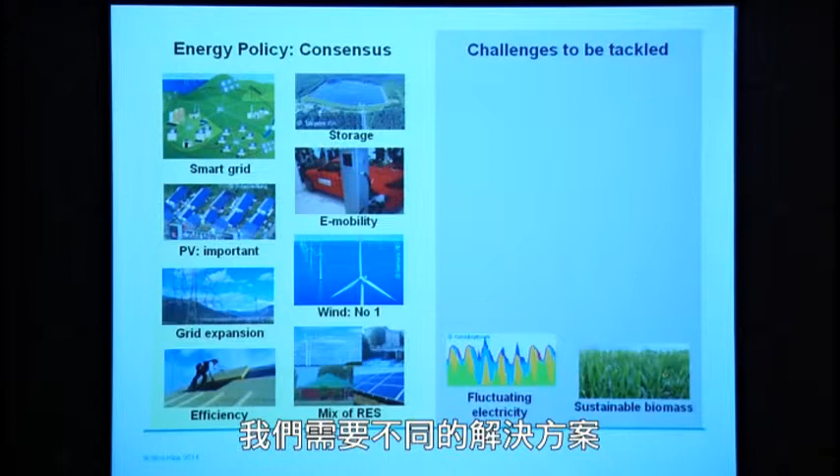We have to deal with the fluctuating electricity. We have to further work on solutions. Biomass will be used, but it has to be provided in a sustainable way. This is very important. At the beginning, renewables need a higher investment, and so we have to deal with the problem to finance these costs.

The role of nuclear and fossil power has to be decided by the governments, and governing that transformation is very important. I want to say and underline that again. It's a question of policy to decide the goal and decide the necessary measures to make that happen.

And what we also need and will see is new business models, because if the energy world is changing, also new business models are necessary to attract private investments into that sector and make that happen. So these are some of the main topics which are there in that field.

I want to come to the smart energy cities, because cities and regions are very important to make the transformation happen. Why is it so important? 75% of greenhouse gas emissions are produced in cities and communities, and a lot of these transformation measures I already mentioned must be realized on local level.

So an active contribution of the citizens is necessary, of the industry, the public sector, because they have to invest in energy efficiency and in renewable energy. They have to change the type of mobility and use public transport, and they have to change perhaps also their behavior and accept the changes.

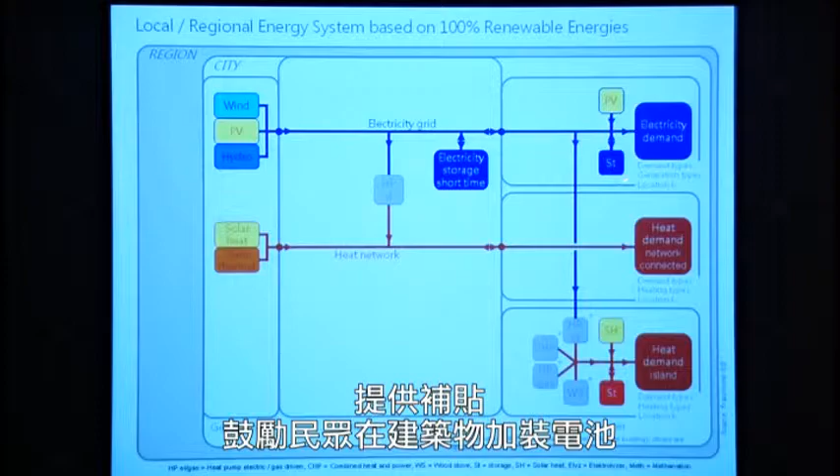What we see is that photovoltaic is more and more installed on the buildings, and also in Germany we now have a subsidy program which provides subsidies to install batteries on building level in connection to the photovoltaic plants in order to shift a little bit of the solar electricity from the day towards the night. But short-time electricity storage capacities will also be installed on distributor and grid operator level.

What we will see is that electric vehicles will be charged on the building level, but also on the distribution grid level, and this will also influence the demand curve on the electricity grid. We will install more solar thermal systems with storage either on the building level, but also what we see in the future is heat storage on a seasonal level.

This means heating up these huge storage tanks with several thousand cubic meters of hot water during summertime by solar energy, and this can be used in wintertime for space heating.

What we see is we already have a gas network, a natural gas network, and this can be transformed or used in future to transport biogas, and so biogas will be available to run combined heat and power plants or gas heat pumps, and biomass can also be used as wood for wood stoves in the buildings.

But if we have this biogas network, we can also use that for centralized combined heat and power plants, which are providing heat and electricity. We can use it for heat pumps and also for combined heat and power plants here on these bigger buildings. This could be an industry plant, this could be also a shopping mall or something else.

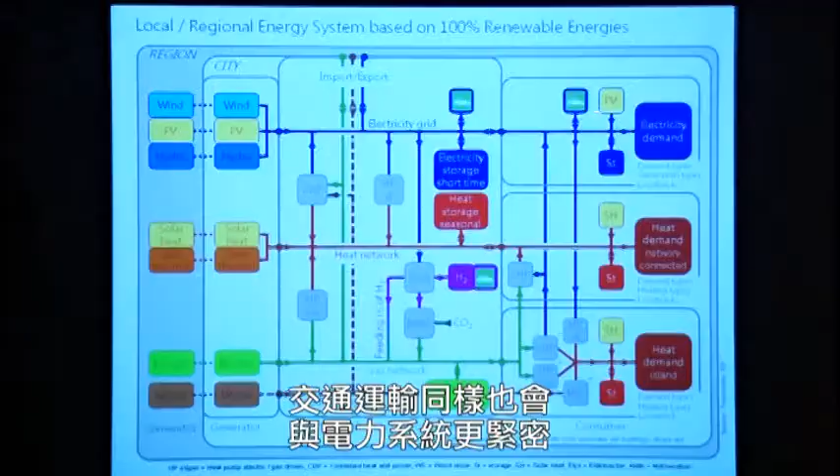So what I wanted to show to you here is this general description of the energy system of the future. First of all, only renewable energy will work. It's possible to create an energy system which is only driven by renewable energies. And secondly, what we will see in the future is that the electricity, the heating network and the gas network will be working much more closely together and will be much more connected to each other. Also, the transport sector will be much more connected to the electricity sector.

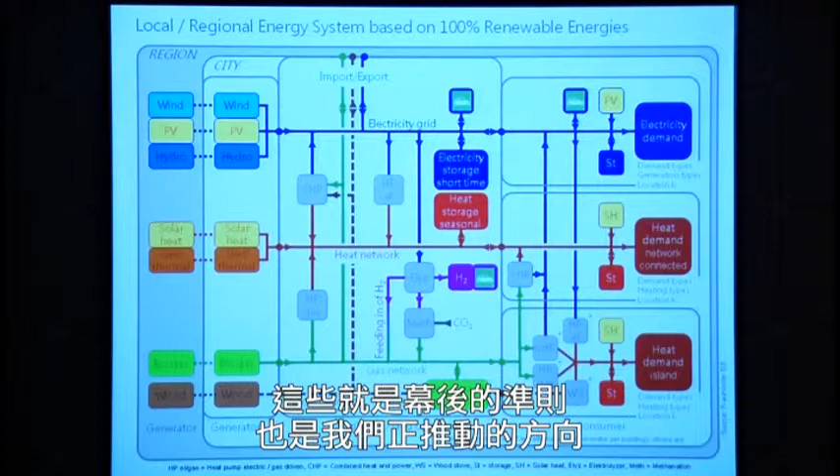So this leads to the point that we have to find intelligent systems and ways to design and run these kinds of systems, because it is much more connected, and we have to deal with the fluctuations as well. So this is the principle behind it, and this is the direction in which we are working.

So to summarize the characteristics of that kind of system: we will see an increased regional autonomy, so a decentralization. We will see an increased interdependency of energy sectors: electricity, heating, cooling, mobility. We will see an increased complexity of the system, so this needs intelligent control concepts and strategies. And the use of smart technologies is necessary, ICT, self-optimizing subsystems.

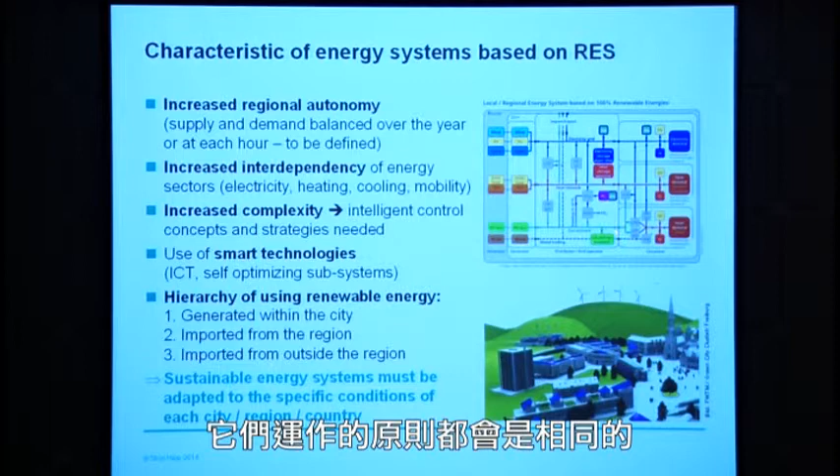And the hierarchy of using renewables is very simple. First, use the energy generated by renewables within the city. Then the energy which can be imported from the region, and then, if it is not sufficient, also imported from outside the region. And this means a sustainable energy system must be adapted to the specific conditions of each city and region and country. So if you have such systems which can be applied to every kind of city or region, the principle is always the same, but you have to find the right adaptation to the specific conditions you have.

What does this mean? How to come to such a system? This is very simple. You have to develop roadmaps. If you start with today's energy system, you have to define a target energy system. So target setting is important, where you want to go to. Development of target energy systems is based on the specific targets on the one hand, and also on the assumptions for the boundary conditions.

If Taiwan is thinking about the long-term development, you have to think about if electricity demand will increase or will be reduced. What do you expect? How much efficiency increase will be possible? You have to take that into account if you want to design the target energy system.

And if you have a clear picture of the future, then you can develop the transformation roadmap. Which measures are necessary, in which order, which investment costs are needed, and how to design this transformation in a robust and flexible way. So the roadmap development will follow in a second step. This is the principle of how you come to such a concept for such a transformation process.

This can only be done if you use some computers, some modeling tools. So we developed modeling tools to calculate such optimized target energy systems for cities, temporal highly resolved simulation of the electricity, heat and cold and transport systems. So you see here some examples of these calculations.

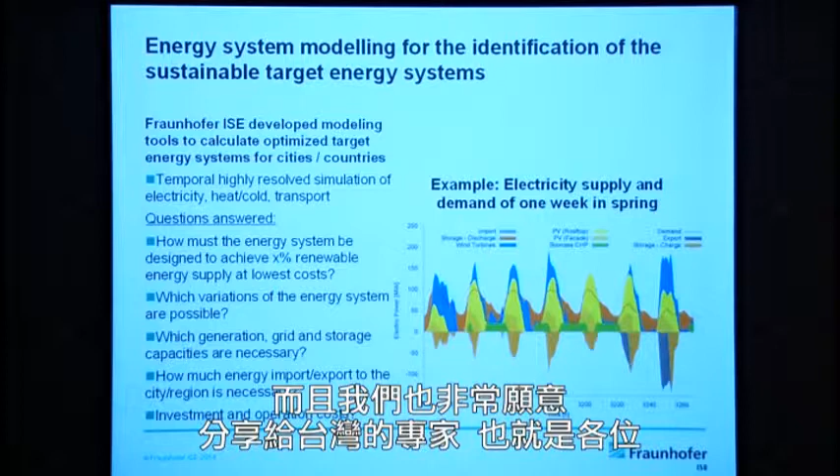You need these tools. We are working on that, and so we would be happy to share also our experience with the experts in Taiwan on that issue. So these are some examples. You see here the challenge in Europe. We have the high heating demand during winter time, no heat demand in summertime, only for industrial purposes and domestic hot water. But if you look on such a week, you have to combine all the sources, solar and biomass and other sources. So this could be some results of such modeling tools.

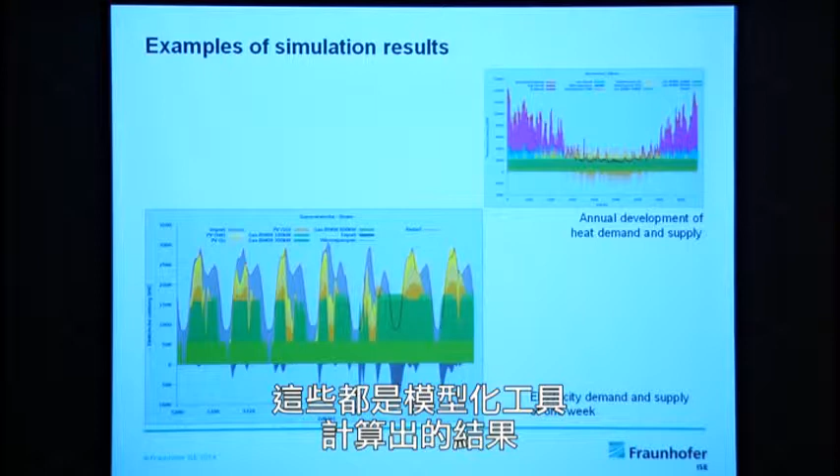I want to summarize the German experience. Germany defined a target energy system for 2050 and developed milestones for 2020, 2030, 2040. In most aspects, we have a very successful development over the last years because we increased renewable energy in the electricity sector to 25% in 2013 already, due to the feed-in tariff. The grid expansion is on the way. However, due to extensive participation processes with stakeholders and citizens, the planning phase is rather long.

We have a goal of 1 million electric vehicles by 2020. There are some doubts to achieve that goal, but there are also some optimistic developments. However, strong discussions are ongoing. For example, electricity price increased over the last years, so this is an important issue. Greenhouse gas emissions are increasing due to increased coal firing. Also, this is an issue, and efficiency is behind schedule. So there are challenges. You have to work on that, but I'm very optimistic that we will be able to achieve the goals because we have to learn how to deal with these challenges, but from my point of view, we are on a good way.

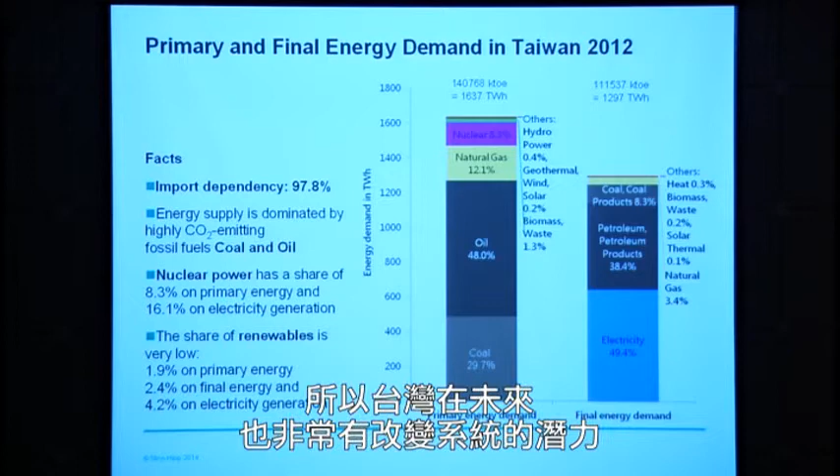I come to Taiwan and Taiwan's energy system, at least what I have learned over the last weeks on the Taiwan energy system. And first of all, I have learned about this huge import dependency, 97.8%. Energy supply is dominated by highly CO2 emitting fossil fuels, oil and coal, here on the primary energy, and natural gas. Nuclear power has a share of 8% on primary energy, 16% on electricity generation. And the share of renewables is very low at the moment, 1.9% on primary energy, 2.4% on final energy, and 4.2% on electricity generation. So there is a huge potential to change this system in the future.